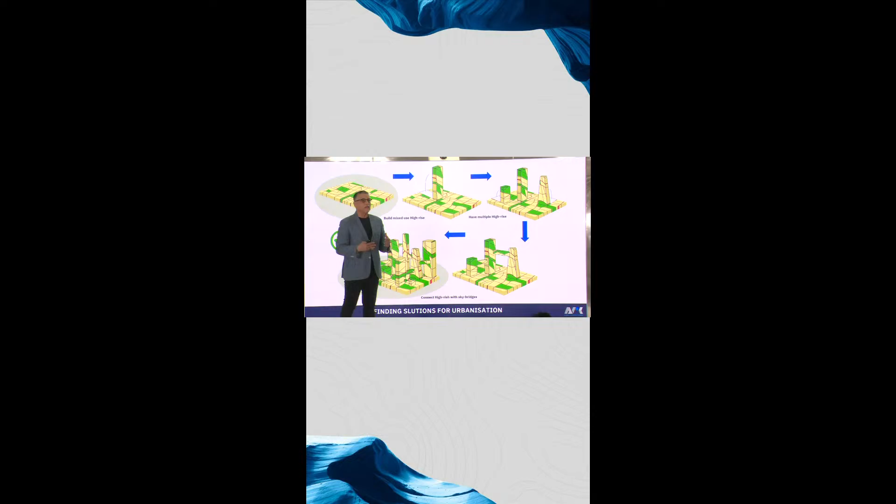But just by doing vertical city, it's not going to be solved, because you'll have vertical concrete jungles. So we should start looking at towers which are integrated, towers which have got terraces, towers which have intermediate bridges, towers which are connected, so you don't use vehicles, you don't use fossil fuel, and you don't lose time while traveling.

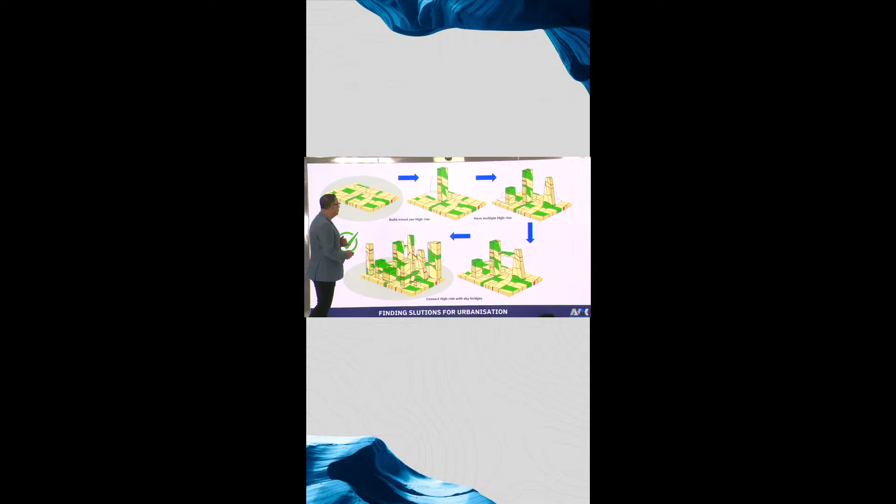The efficiency of the person is higher. So you have less covered floor space, integrated office, retail, and residential at one place, which saves time for travel and boosts efficiency of users. If you travel for 1 or 2 hours to get to your place of work, you're almost tired. You get back home, you got another 2 hours of travel.

So you're losing almost 4 hours of your efficient time. If you have something within one complex connected with bridges, you can walk to work, you can travel within the same complex without even using a vehicle. That would increase your efficiency, reduce pollution, and you'd be using less fossil fuel.

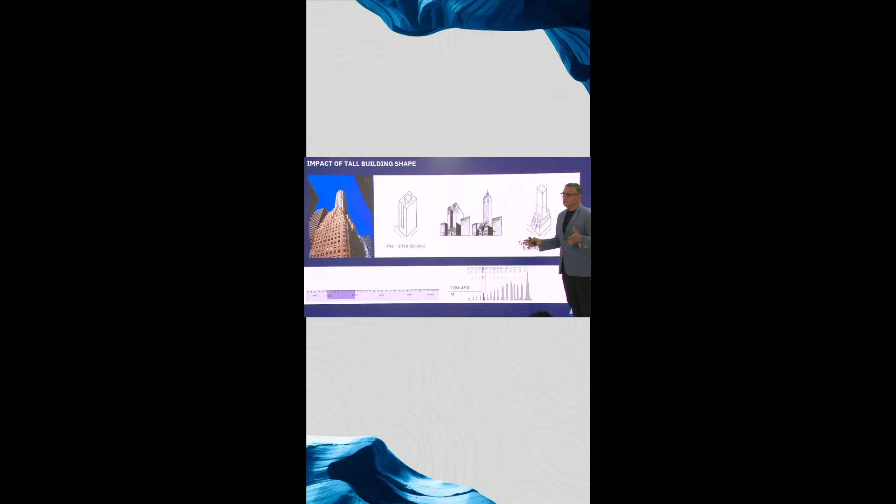So in this phase, the second generation, they started building buildings with a larger base, and it started stepping and going up. So it was also called the wedding cake structure, as it had a larger base and then kept on stepping and going up. So that was the second generation buildings.

And these are the third generation buildings. They started in 1951 to 1975, and they went up to 500 meters. Here, if you see, there's more glass, less concrete. The core was in the center. And because the technology started changing, we got better high-speed elevators.

But here we had only single glazed glasses, so the energy consumption was very high. So many buildings came up with black glass at this time, and that was called the black glass skyscrapers.

Towering glazed office blocks became fashionable as company headquarters. Glass curtain walls became the status symbol of confidence, companies and silhouettes of glass towers a sign of prosperity of the city. So they wanted to make a statement, and that was what people started doing by making all these glass tall structures.

Then we came to the fourth generation of high-rises, that's from 1976 to 2008. And during this period, we have the tallest tower, that is the Burj Khalifa, which is 828 meters.

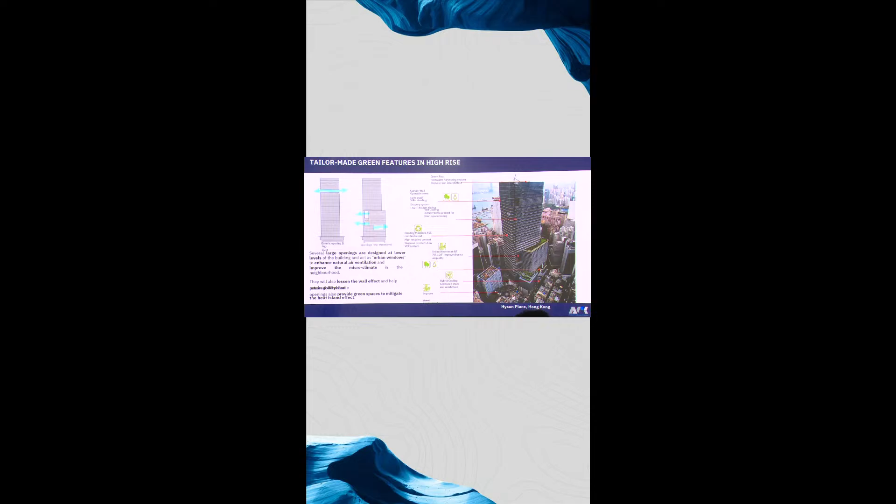So what happens is you get wind circulation for the streetscape also. Otherwise, if you build towers, when you're on the lower level in the city, you don't have enough ventilation. So if you have cutouts, these are not just a design or elevation element, they have a reason why they've been done.

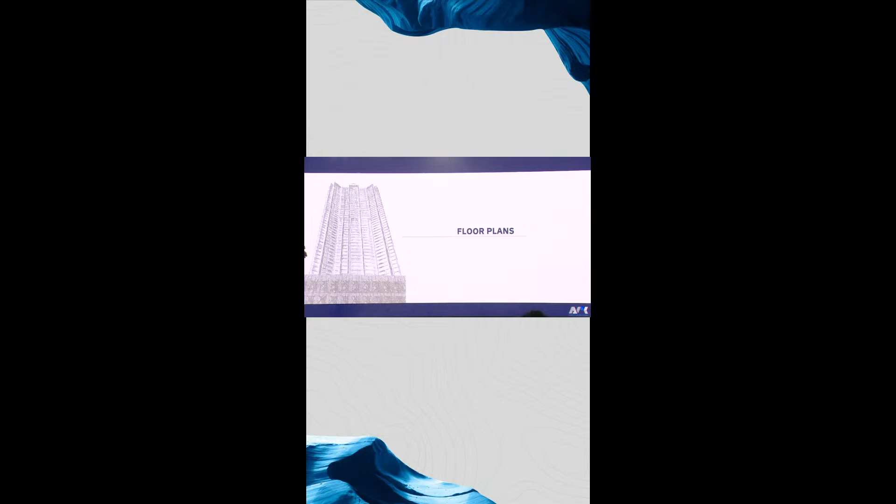So I'll go to the plan and explain more. It had a very linear access, about 12 meters, which comes right into the main plot, and we have the entire plot out here. That's the drop-off that we created. It's under construction now, shortly you'll see that, but these are the visuals we have done.

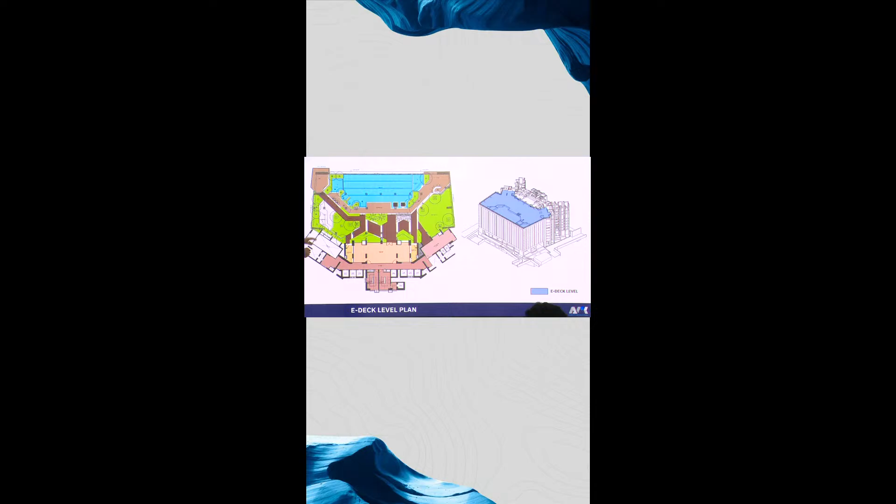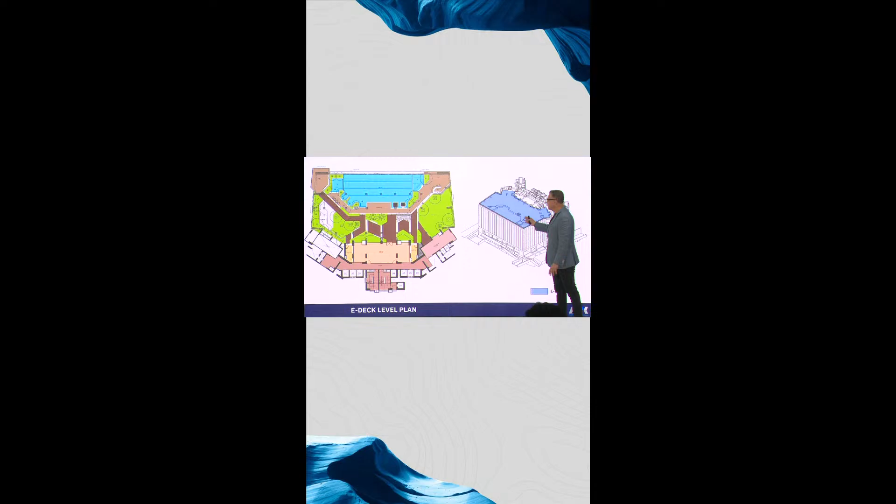So the entrance lobby, the drop-off areas, and then we come to the E-deck. We have 8 levels of E-deck. Once you're at this level, these are all parking floors. From here you get the exact sea view, unobstructed. That's the E-deck, the swimming pool, and the entertainment areas. We have the gym out here, the club, and they have a restaurant as well.

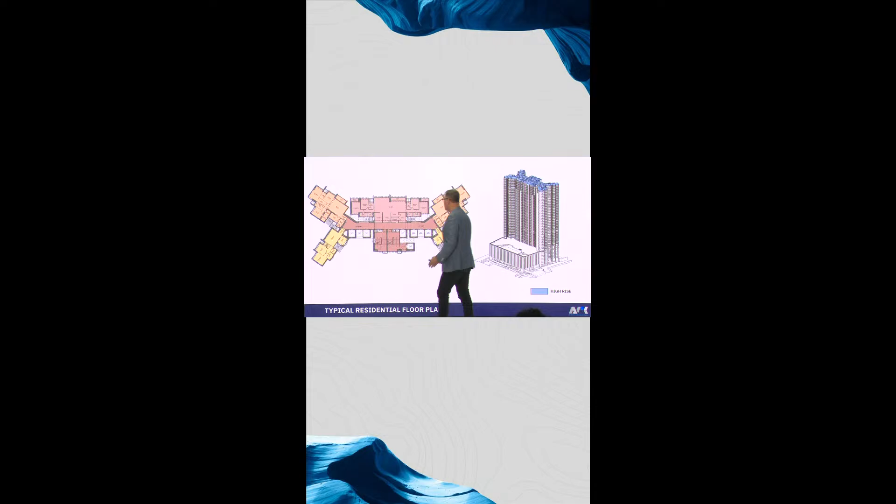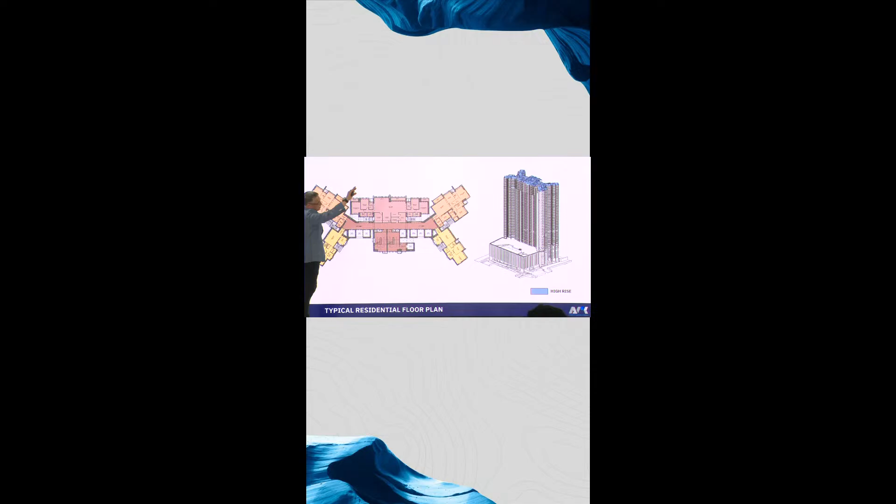So what we did, we had to consume 8 lakh square feet, and we wanted the entire building, all the flats, to face the sea. We managed to do it by taking the core on the backside. So we've got a dead wall out here, and this is one apartment, these are the other apartments, and because we have the whole sea going this way, we got the entire flats to get the view.

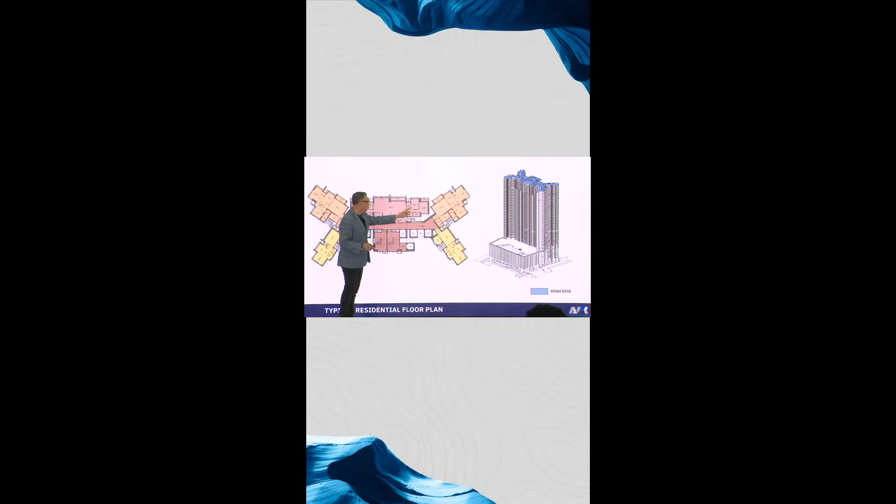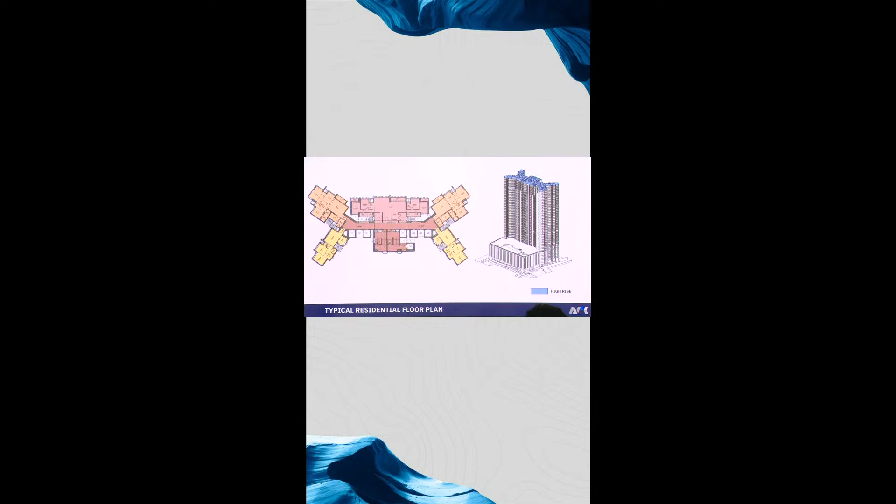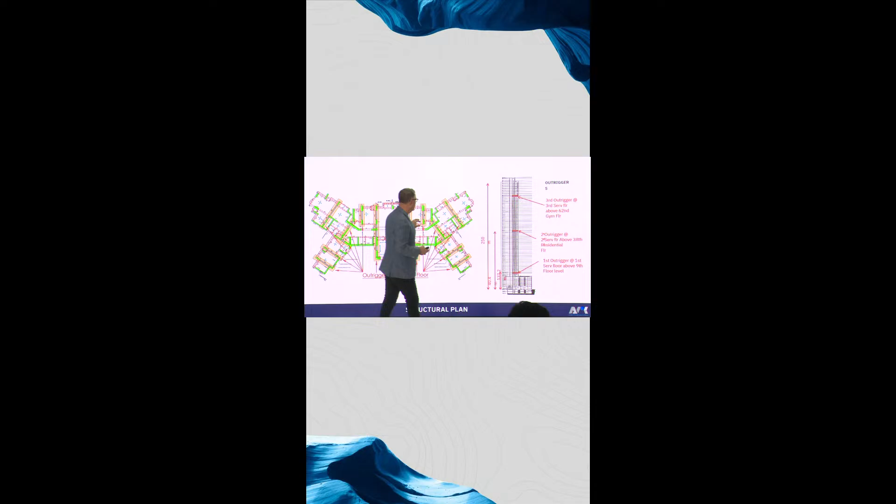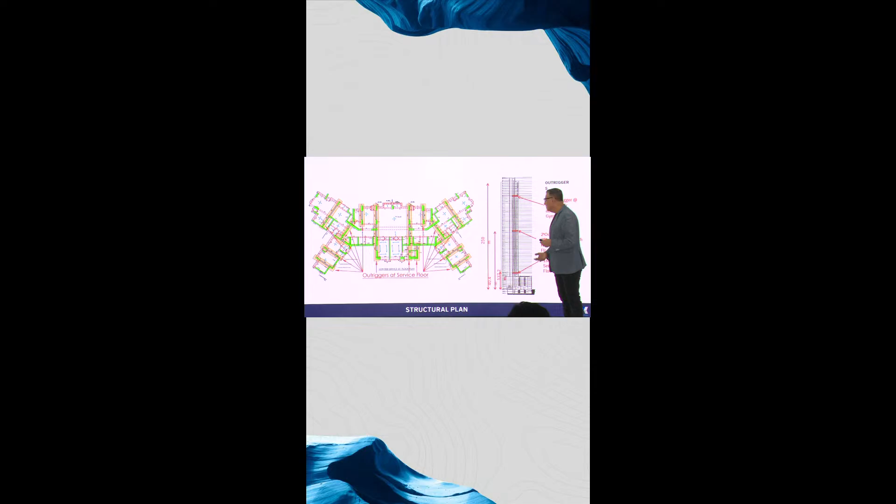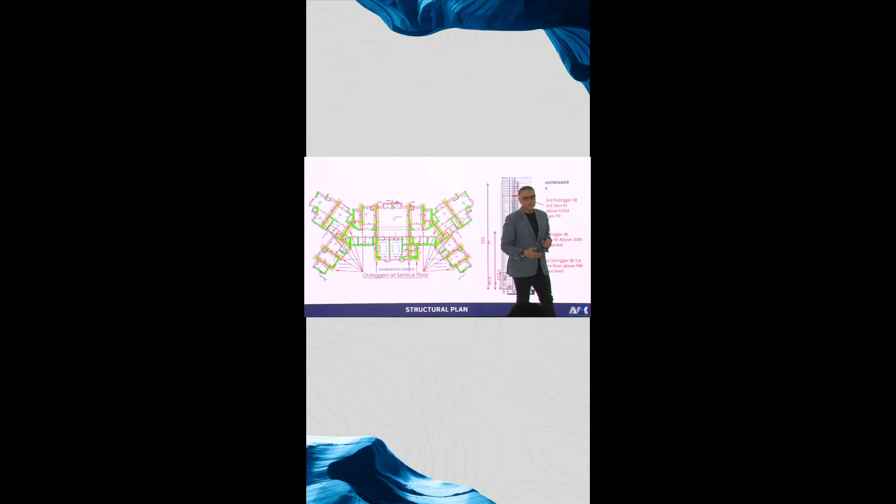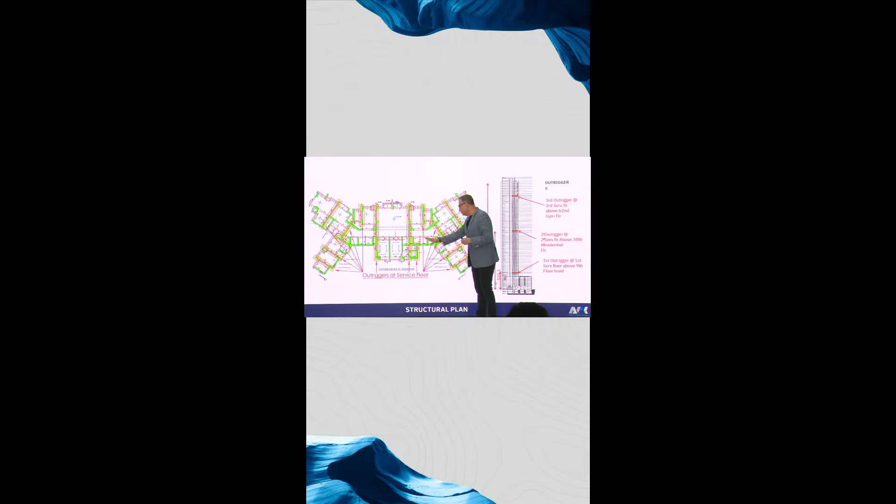When you do something like this, it's a very big challenge, because this tower goes into torsion. As you do larger projects, you'll understand what I'm trying to explain. These wings move differently, and the building goes into torsion when you do the simulation of the structure. We had that challenge, and because we had dead walls on the backside, we created structural elements which controlled that torsion, and we got all the views in the front.

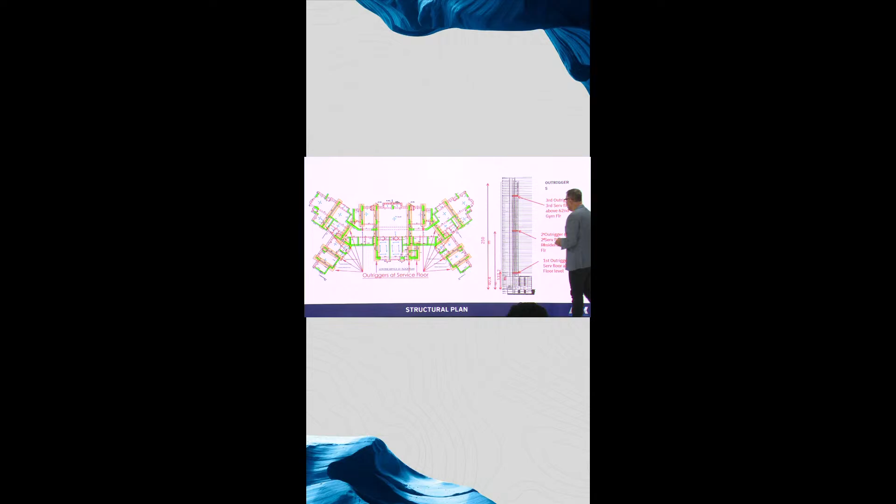In between, when we look at a service floor, we have outriggers. As you get into projects, you'll come to know what an outrigger is. An outrigger is something which holds the building and doesn't allow it to go into torsion.

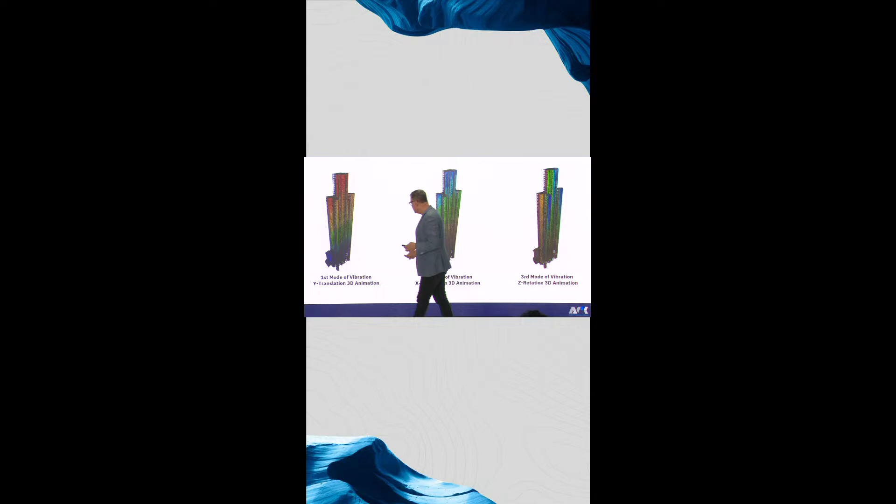I don't know if this can move, it's not doing it, anyway, but these are simulations. You can see how the building acts in the first mode, second mode, and third mode. We actually do that study before we get onto the ground, and we reinforce the building to ensure that it doesn't move in an earthquake.

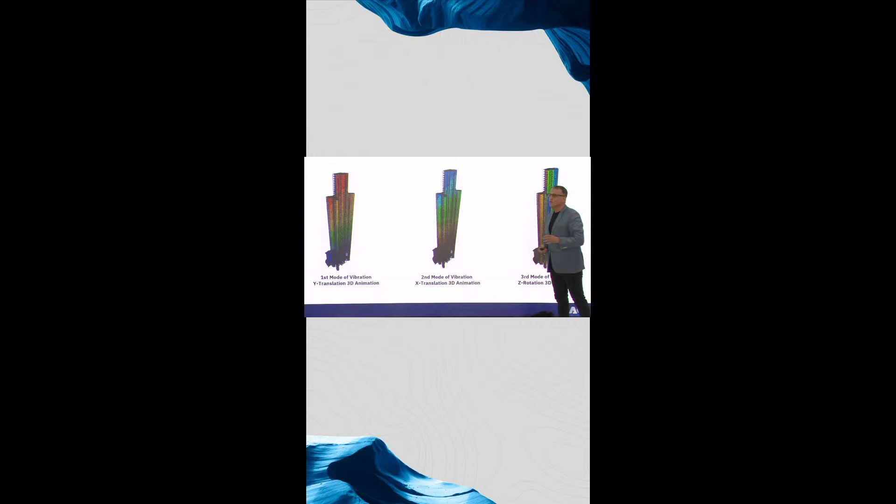The other major thing when you're doing a high-rise is that wind plays a very important role, more important than earthquake or seismic load. I don't know if you've experienced going into a very high-rise building when there's a lot of wind, you can actually feel the building swaying.

Before we get onto the ground, we do a wind tunnel testing. We make a model in an enclosure, simulate winds at the highest forces, and see how the building acts in that situation. We design it so it doesn't affect the people staying in the apartments, because it can really give you nausea.

In a lot of buildings overseas, they put up a pendulum right on the top, or the water tank is designed so the water has an extra freeboard. So when the building moves, the water goes to the other side and retains the building from movement. This is what we do before we start the wind tunnel testing.

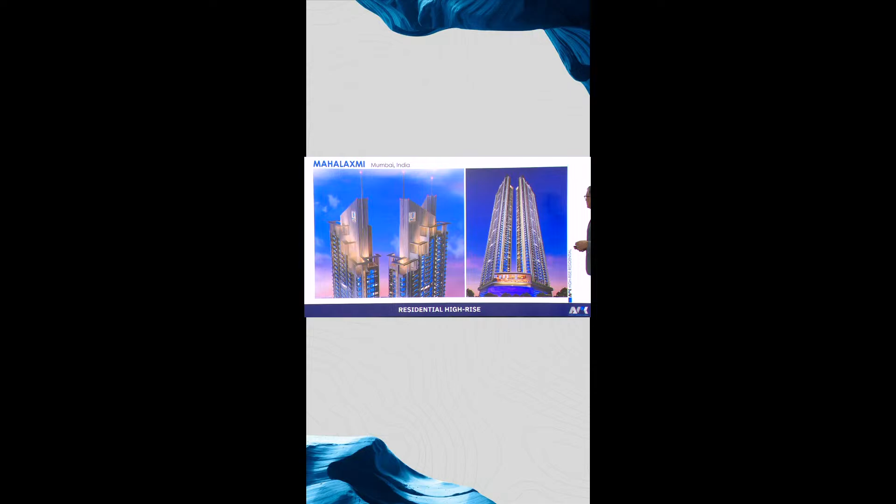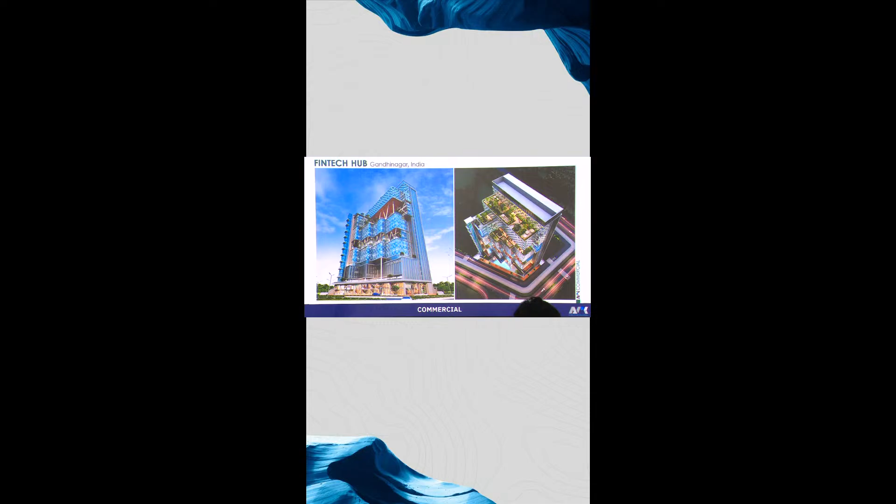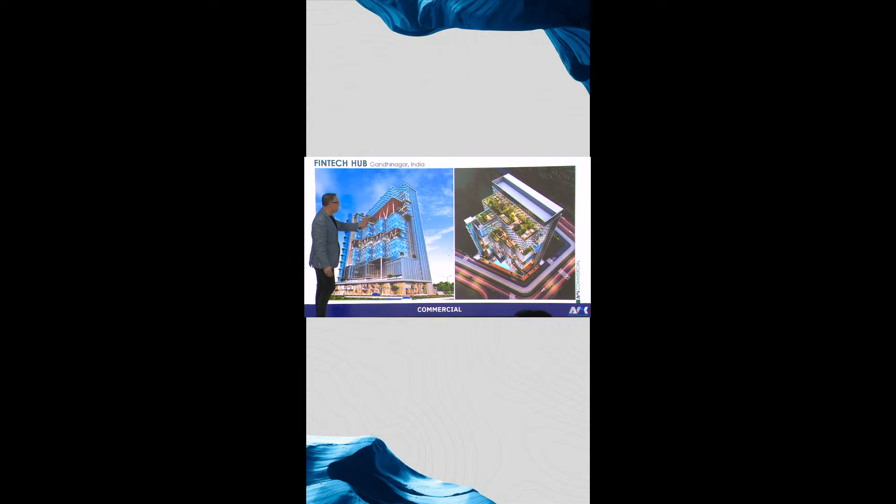That's another example of what we said earlier about terraces. So here, this is a fintech hub, and we have startups, accelerators, and then larger companies. They have interactive spaces out here. The startups have it here.

The accelerators have it out here, and the larger companies have it over here, so you don't have to come down every time if you want to interact. You have these terraces, and they also help because the wind passes through this tower and goes across.

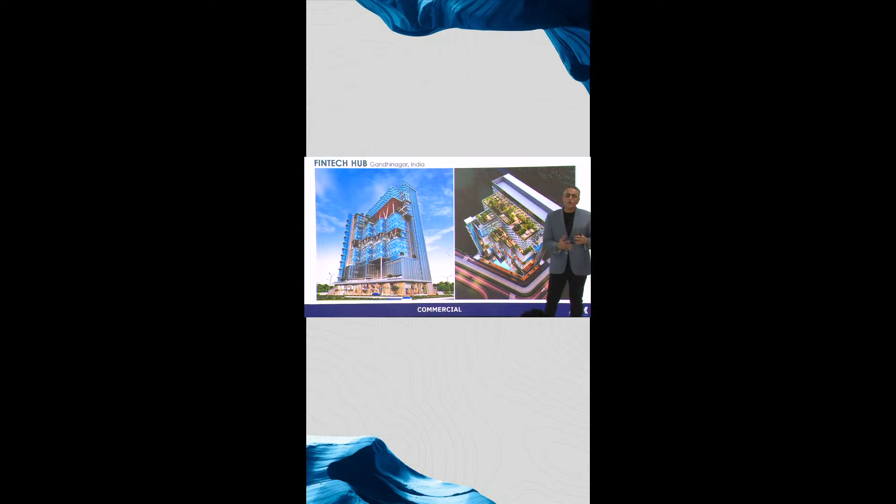The problem with wind tunnel testing is that buildings normally resist and do not allow the wind to pass, so your structure becomes heavier, as you have to design it to withstand those wind forces. By doing these kinds of tunnels through the building, you're helping the structure, making it lighter.